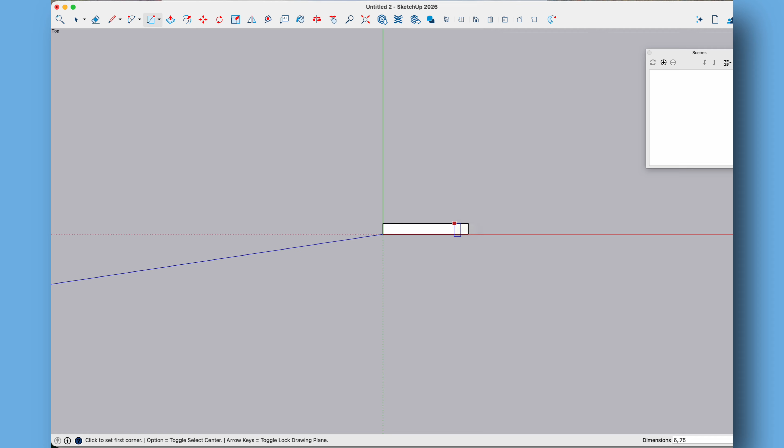Hey everyone, today we're making a custom white oak crown molding for a fireplace mantel. The client wanted a profile that isn't readily available, so we're going to model it in SketchUp and then bring it into VCarve to machine it on the CNC.

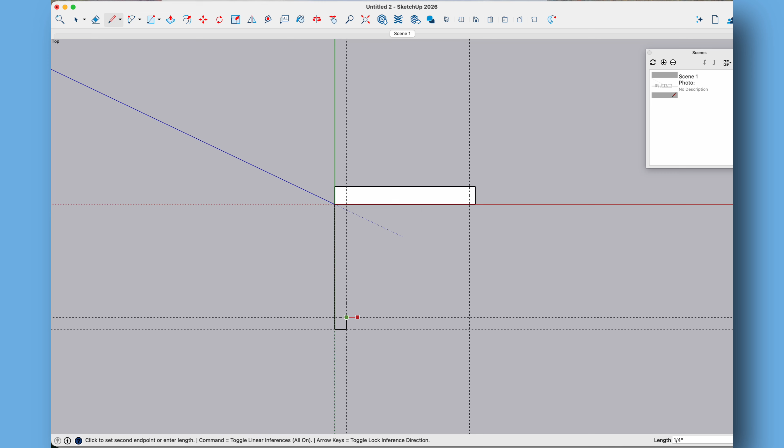We'll start by drawing a 6-inch by 3/4 inch rectangle. From there, we'll use construction lines to lay out the basic profile and all the details the client wants. I'll draw a 3/4 inch arch, then divide that arch into multiple sections to create a much smoother curve.

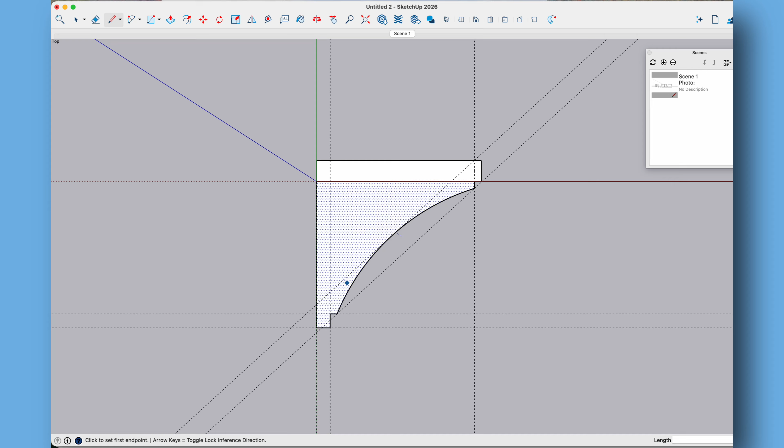Once that's done, we'll connect the lines, set the board thickness to 1.25 inches, draw the back of the crown profile, and delete the triangle. That gives us the profile we're after.

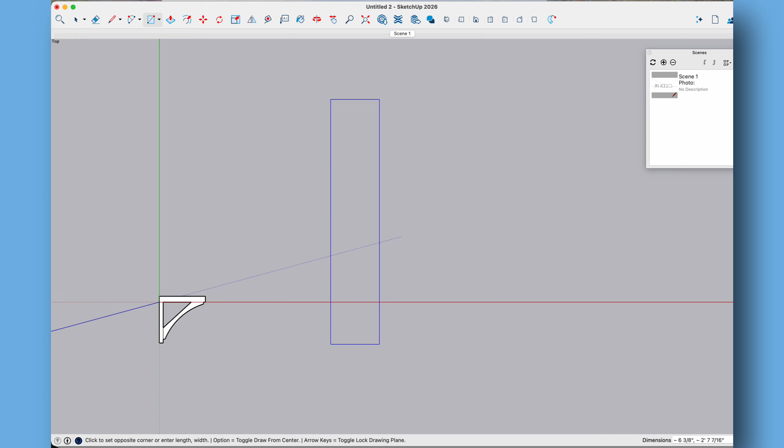Now we'll create the actual stock. Using the rectangle tool, draw a piece that's 7.25 inches wide by 96 inches long, since that's the material we'll be carving from. Then push and pull it to 1.25 inches thick.

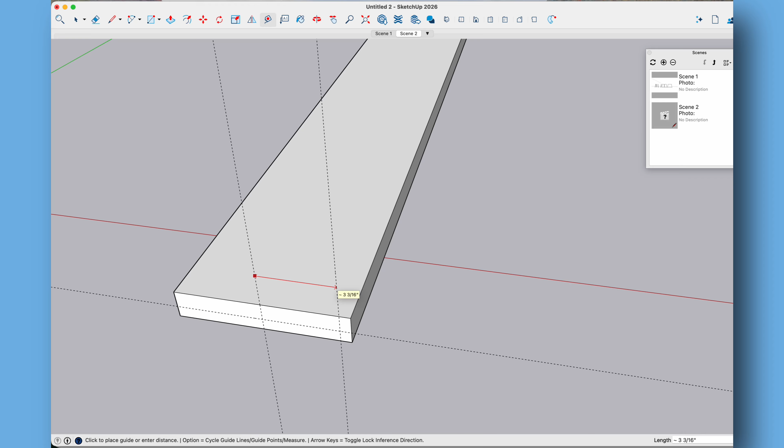Next, we'll use construction lines again to locate our 3/4 inch arch. Mark the center of the board, then measure tip to tip of the crown. In this case, it's 6.75 inches. So from center, we'll measure out 3 3/8 inches to each side. That gives us the correct location for the arch.

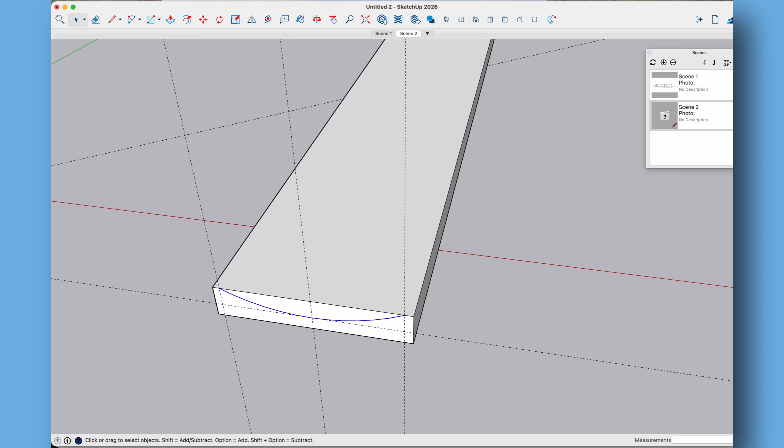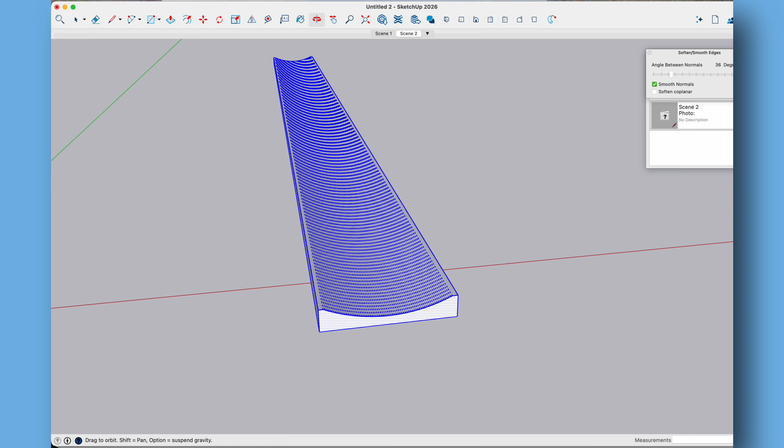Again, I'll divide the arch into several sections to keep it nice and smooth, then use push-pull to cut it all the way through. At this point, you'll notice a lot of visible edges in the model. To clean that up, go to Soften Smooth Edges, activate the tool, and soften those lines until the profile looks clean. Once that's done, delete the original side profile from the drawing and save the SketchUp file.

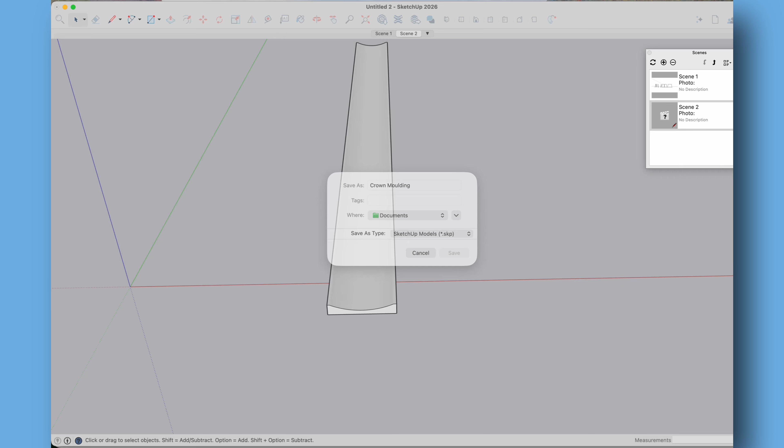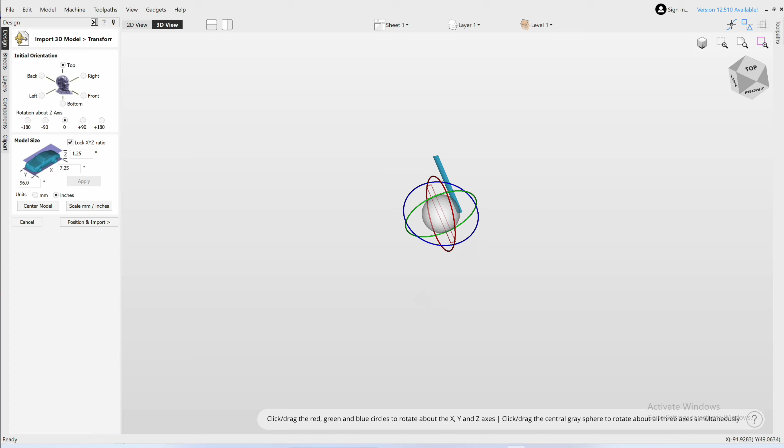Now let's move over to VCarve. We'll create a new job using material that's 7.25 inches wide, 96 inches long, and 1.25 inches thick. I'll set my Z0 to the material surface, but use whatever workflow you're comfortable with. Next, import the SketchUp component as a 3D model. Center it on the material and then click Next.

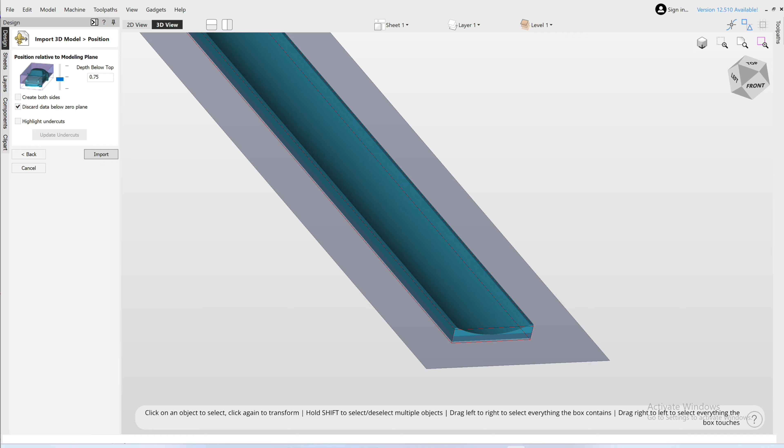For the depth below top, choose relative to model plane and enter 0.75 inches, since that's the depth of our arch. Make sure Discard Data Below is checked and then click Continue. Now we're ready for toolpaths.

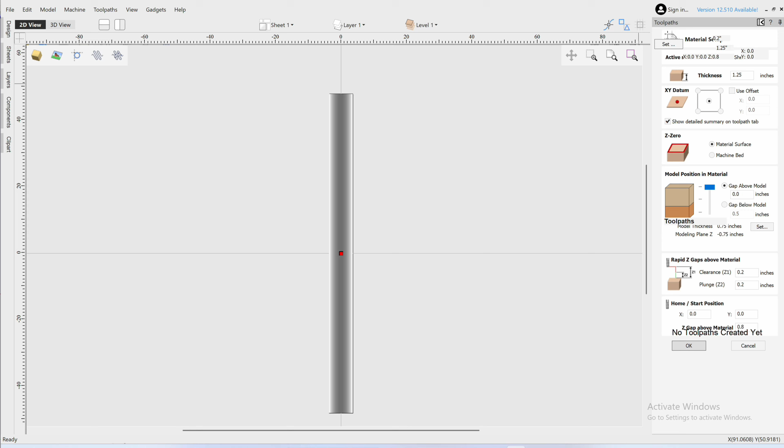First, we'll create a 3D roughing toolpath. Set the machining thickness to 1.25 inches. Select the 3/8 end mill. Make sure the machining limit boundary is set to model boundary and calculate the toolpath. If we preview it, you'll see it removes the bulk of the material very quickly.

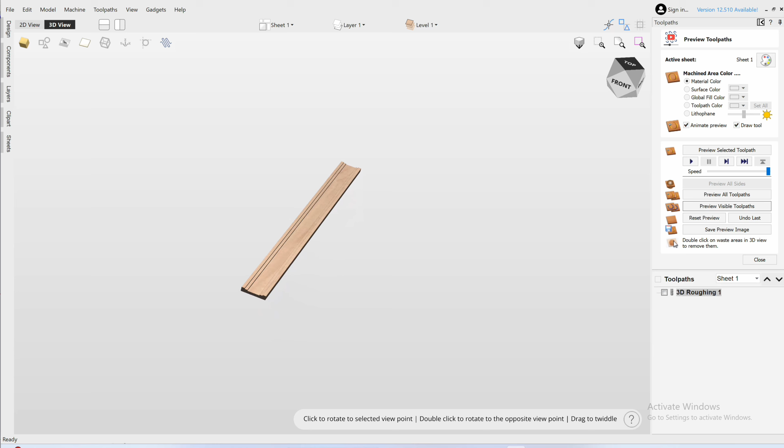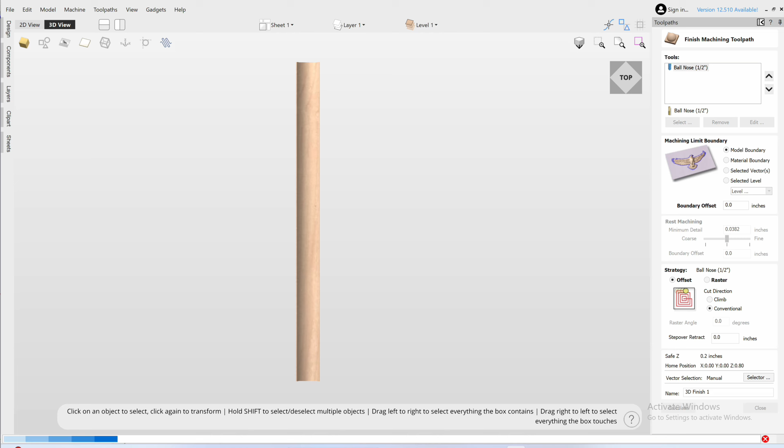Now we'll create the 3D finishing toolpath. I'll use a 1/2 inch ball nose bit. Keep the machining limit set to model boundary and calculate. Reset the preview, then preview all visible toolpaths. You can see the roughing pass removes most of the waste, while the finishing pass leaves us with the final profile.

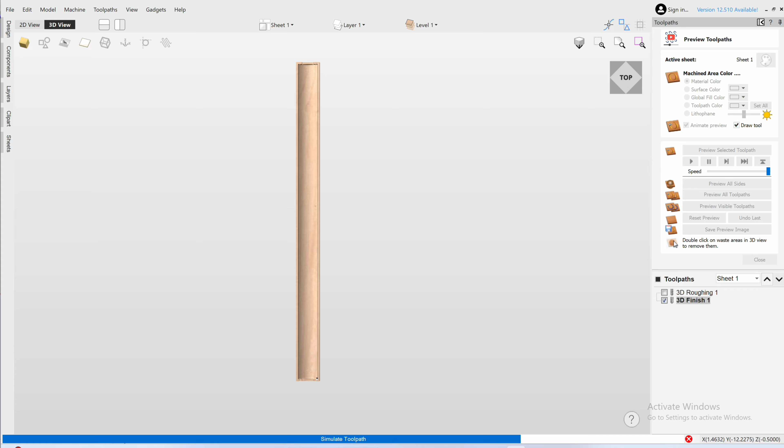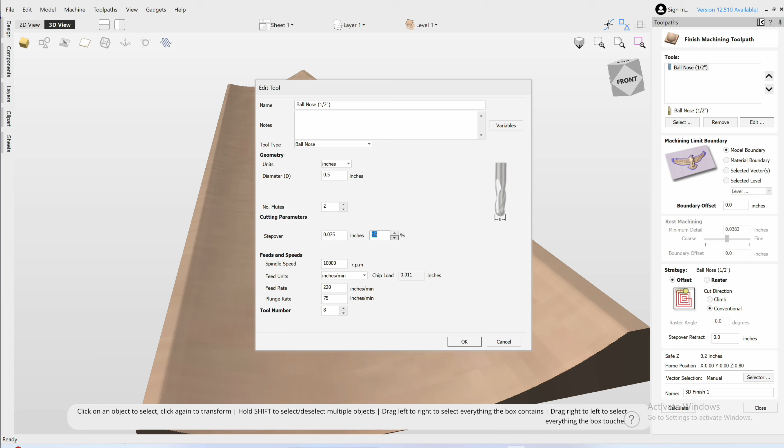If you zoom in, you'll probably notice visible machining lines. Those usually transfer to the actual carving, so let's improve that. Go back into 3D Finish tool, edit the tool, and reduce the step over to around 9%. Recalculate the toolpath. Reset the preview, and preview everything again.

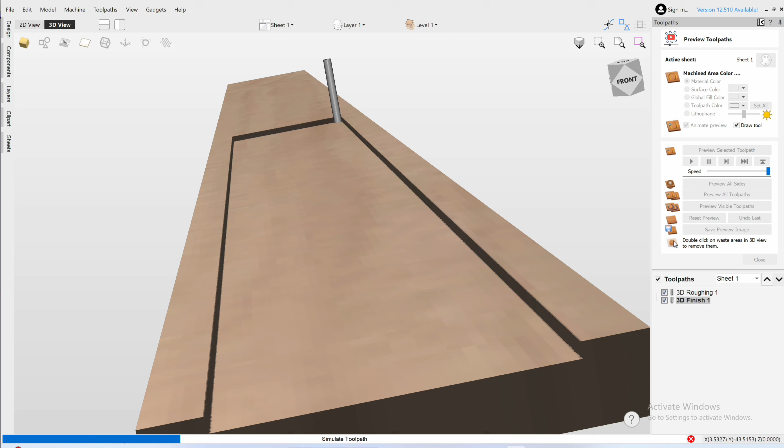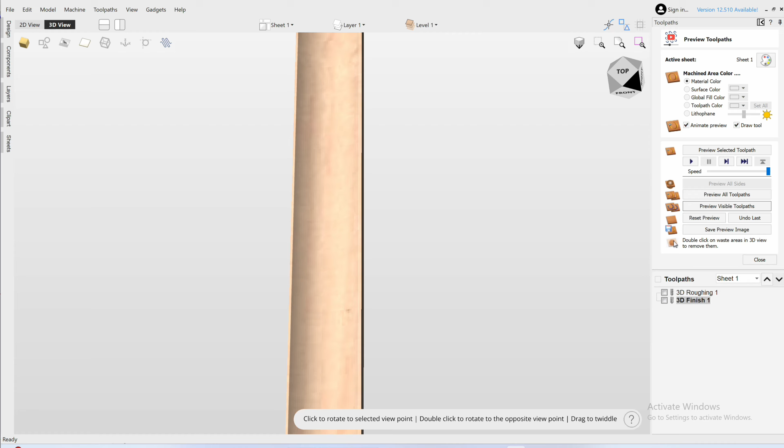Reducing the step over means the bit moves over a shorter distance on each pass. It increases machining time, but it leaves a much smoother surface and dramatically reduces the amount of sanding afterward. Once everything looks good, close the preview and save the file.

One thing to keep in mind, if you're trying to save both toolpaths together, VCarve will give you an error because we are using two different bits. Simply save the roughing toolpath first, then uncheck roughing, check only the 3D finishing toolpath, save that as a separate file, and you're ready to start carving.